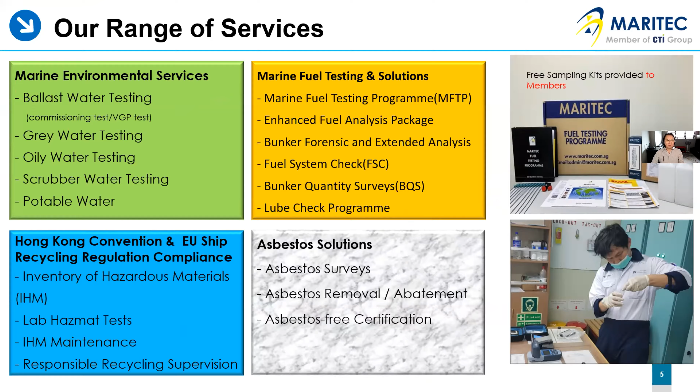Our service portfolio includes water, fuel, and hazmat testing solutions. We are one of the leading marine fuel testing labs, providing a worldwide network and support towards water testing and hazmat solutions at the moment. Where are we located? We are located in Singapore, a small island nation, and we have regional representation in Europe and Asia Pacific to service our clients.

Our fuel testing program ensures a very fast and accurate response from ISO accredited labs based both in Singapore and recently from China also.

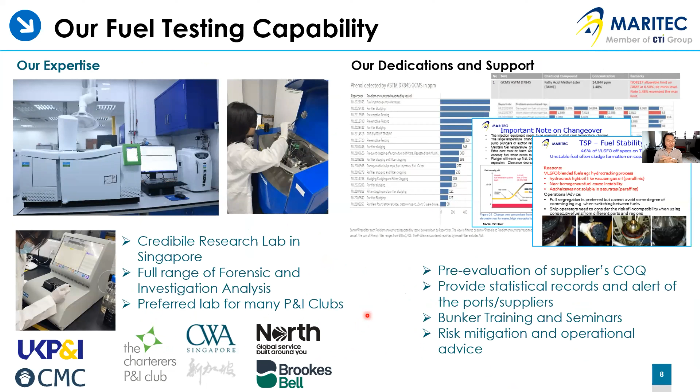Our services are not only regarding standard analysis, we also aim to provide advanced forensic analysis on fuel issues and troubleshooting, which is well recognized by many P&I clubs at the moment, as shown here. At the same time, we strive to provide well-documented statistical bunker and fuel testing records for our clients' review and records.

So with that, let's start with the main topic.

This trend observed throughout the year is quite similar to 2020, and we expect the same level of conformance to continue moving forward for VLSFO residual fuels in particular.

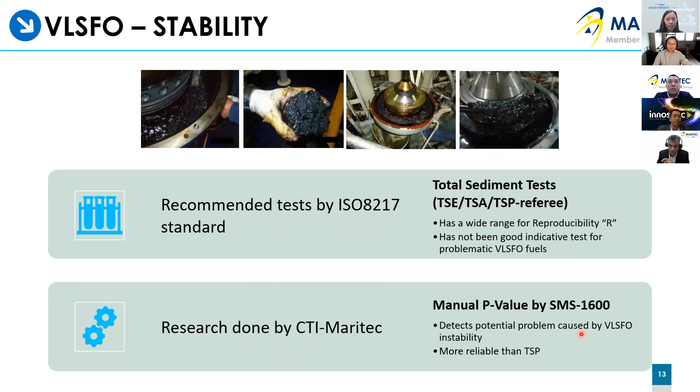What is this manual p-value that I was talking about? The p-value test was initially developed for the refinery process, and then it was later extended towards marine bunkers because it's quite a reliable test.

The value ranges from an unstable sample, which is less than 1.0, and goes all the way up to values greater than 1.5, indicating a more stable sample with more strategic long-term storage capabilities.

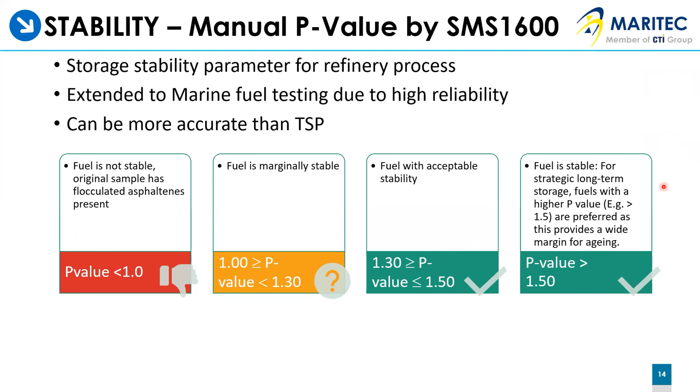This means that TSP, although a referee method indicated in ISO 8217 pertaining to the stability of the fuel, may no longer be a reliable criteria for VLSFO fuels. The p-value may be a good additional preemptive test to perform to weed out any problematic fuels, and we recommend that you do the same as a preemptive test.

Moving on, apart from stability, the cold flow properties of VLSFO, more specifically the wax formation of fuel, is starting to become a concern. So your pour point alone may not be an effective method to mitigate the risks associated with wax formation in the storage tanks or the fuel oil system.

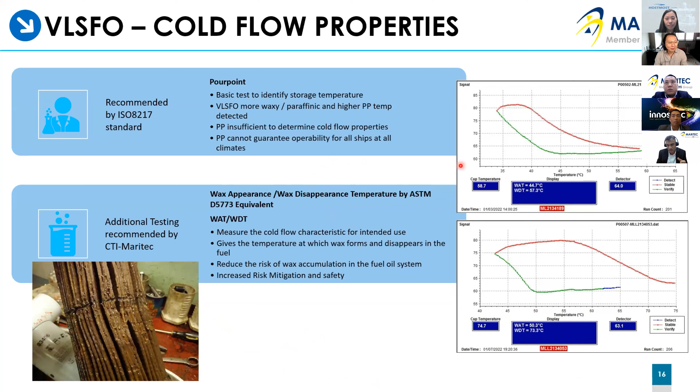Let's have a look into more data that has been obtained by the wax analysis, which has been done by WAT and WDT tests conducted by Maritec. Let's try to understand the issue a little bit better here.

When we look at the analysis data for the last one year, we can see that about 24% of the VLSFOs have pour points above 21 degrees centigrade. This we have identified as a group of fuels with a higher risk of wax formation. At this point, about 21, we recommend to conduct the wax analysis to identify the temperature at which the wax begins to form and disappear.

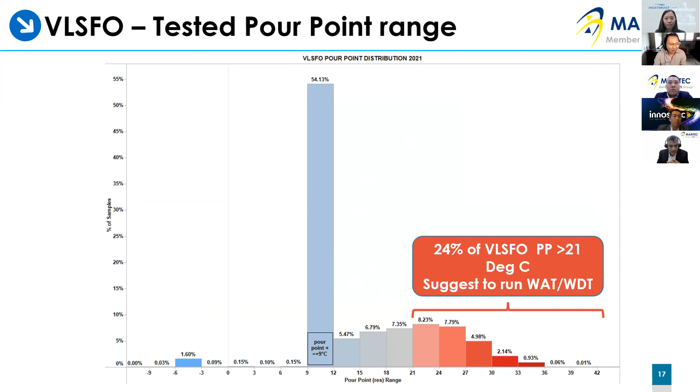If the correct WAT is not identified, the vessel operator faces the risk of solid waxes forming in the storage tank, which can later manifest as depositions and transfer issues over the course of time. So we continue to recommend, if you don't know your WAT, continue to maintain it 10 degrees above your pour point. However, in cases where the WAT is identified, this may be a much better reference value for you to store the fuel.

So this means that if solid waxes are formed due to low storage temperature, the ability to revert back to liquid fuel may prove to be very difficult.

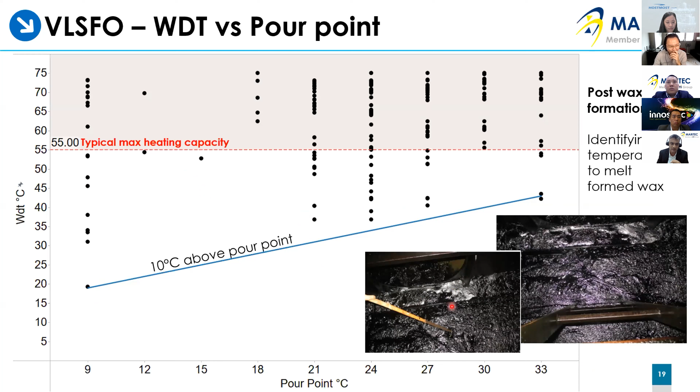Moving on, apart from wax, we're also looking at cat fines. Cat fines are still present in VLSFO fuels, even though it's low sulfur. The ISO 8217 edition caps the maximum amount of cat fines at the manifold inlet between 40 and 60 ppm, depending upon the grade in which you ordered.

At this point, we like to emphasize that proper fuel cleaning and treatment, reducing the cat fine content at the engine, is very important. This is also due to the fact that cat fines can accumulate in various parts of your fuel oil system, and only routine sampling of different points of the fuel systems can identify and preemptively prevent issues arising from cat fines in the engines.

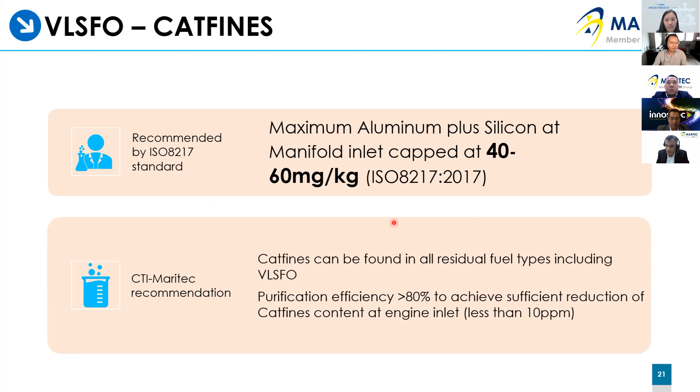And we all know that when the damage occurs, it is a very costly affair to replace a liner or pistons. But the good part is that if abrasive damage is spotted at an early stage, it can be reversed by effective treatment and reducing the cat fines content at the engine inlet.

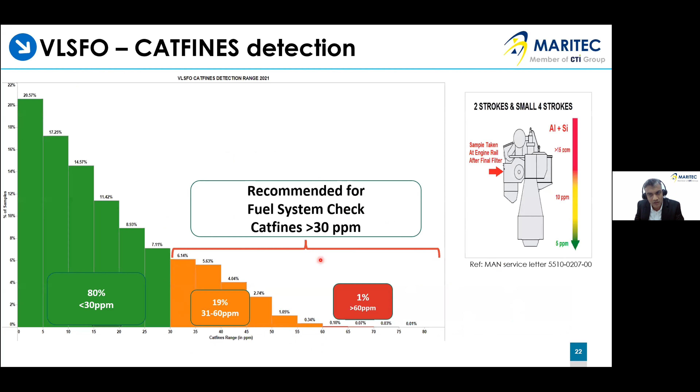So let's have a look at the cat fines detected over the last 1 year. We can see that 20% of the samples have registered above 30 ppm. At this point, when it's above 30 ppm, we recommend that further samples are drawn from the fuel treatment plant on board to ensure the cat fines of the engine inlet is as low as possible.

This will give a very good indication of the efficiency of the purification system on board, and it will ensure very good operational safety. So in conclusion, we can say that with proper care, housekeeping, good fuel management on board, it's possible to keep the risk of damage due to cat fines low. And we recommend that you send in a fuel system check sample to your lab when the manifold sample exceeds 30 ppm.

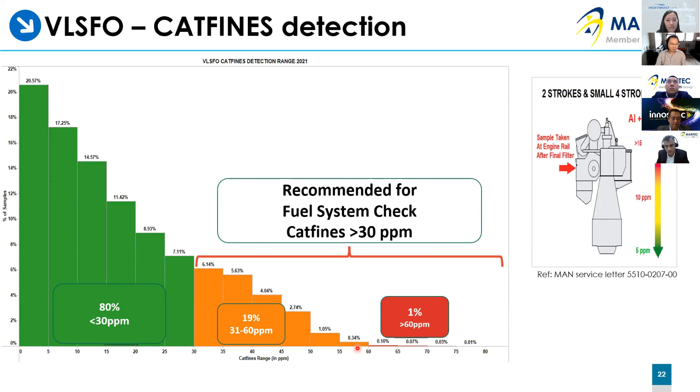Moving on, when we're looking at the combustion properties of VLSFO, normally the combustion properties of marine fuel has been determined by the calculated carbon aromaticity index, in short CCAI, which can give an indication of the ignition properties of the fuel. This is determined by calculation from the density and the viscosity of the fuel.

However, ISO has recognized the limitation of this calculation and has recommended an alternative method to check the ignition and combustion properties of the fuel. So one of the methods identified is the fuel combustion analysis, or FCA, by IP541. This identifies the estimated cetane number, which is dependent on the combustion delay which occurs on the test machine. So whatever combustion delay that occurs on the test machine is calculated to the estimated cetane number, or the ECN.

When we look at the ECN values versus the CCAI for VLSFO fuels which we have tested, we found that majority of the fuels have an acceptable ECN and CCAI values. The issue starts when the ECN falls below 20 and the CCAI is deemed to be acceptable by the calculation and the ISO standard. We can see this occurs for about 8% of the tested samples, and this fuel needs to be used with caution.

It should be noted that the fuel combustion analysis method results displayed here are done in a laboratory with control conditions, whereas the conditions and equipment used vary vastly during actual field usage of the fuel. So in the case where a fuel is suspected to have poor ignition and combustion properties, you need to take engine performance parameters, record them and correlate them back to the FCA test results with actual onboard conditions, and ensure that any manufacturer's operating limits are not exceeded. Thereby you can prove that the fuel supplied had poor ignition and combustion properties.

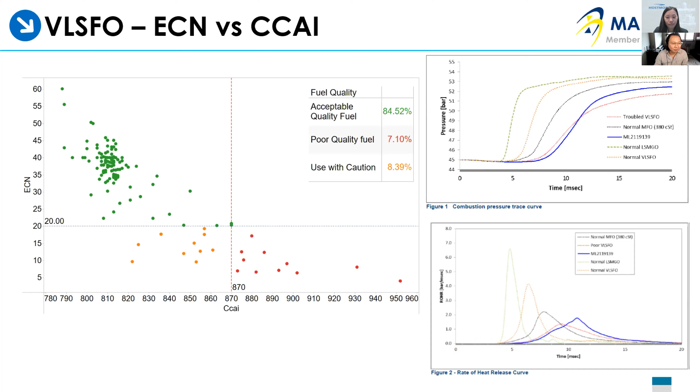Okay, we talked about some of the most commonly occurring issues. Moving on to managing fuel quality issues, specifically we're talking about clause 5 and chemical waste contamination and the effects it has got on the machinery.

So your routine test can identify compliance with ISO 8217 table 1 and 2. However, only further analysis can identify if chemical contaminants are present in this fuel. So there needs to be an understanding right now as to what constitutes a marine fuel and the acceptable sources. This can be given in detail in ISO 8217 clause 1 and clause 5.

Let's have a look at that. So what does it say? The oil needs to comprise predominantly of hydrocarbons and needs to be homogeneous. The source can be from petroleum, crude oil sands, and shale oil. It may be from synthetic or renewable sources which are chemically like petroleum fuel. It can be blended into marine residual fuel oil, but it's limited by the volume percentage specified in the standard.

However, these are the important things. It needs to be free of deleterious substances, and it should not cause any harm to personnel. It should not hinder the safe operation of the vessel or cause adverse effects to the machinery. So these deleterious substances we're looking at here can be identified by advanced detection techniques such as GCMS, which we will look into a little bit more in detail.

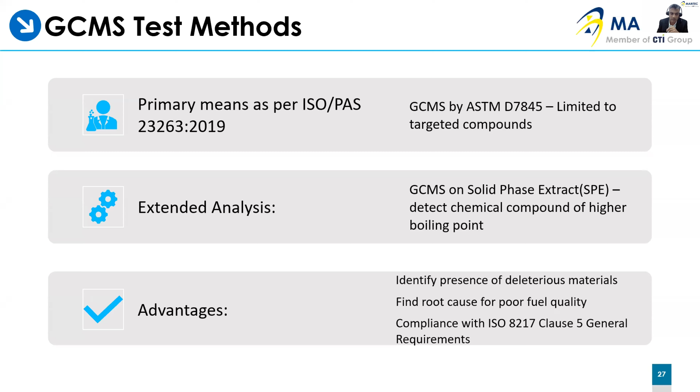Here we see the average detection by ASTM D7845 for the commonly detected compound groups for each month in the year of 2021. We are observing an increased occurrence of reactive hydrocarbon compounds and phenolic compounds, which can play a role in causing poor stability of the fuel, depending on the concentration detected. The average detectant range is around 1800 ppm for reactive hydrocarbon compounds, indicated in dark blue, including compounds like indene, styrene, and dicyclopentadiene.

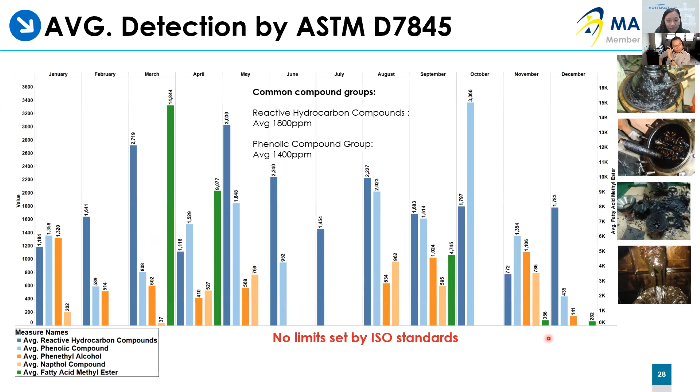And about 1400 ppm for phenolic compounds. At this point, I'd like to stress there is no maximum concentration limit in ISO standards. However, these compounds at the concentration levels detected here have gone on to cause fuel stability issues, which can cause machinery problems like excessive sludging and filter blockages, as shown.

Moving on, when we look at the concentration level of higher boiling compounds, we observe a greater level of polar non-hydrocarbon compounds, which can also lead to fuel instability. These polar non-hydrocarbon compounds can only be detected by GCMS on solid phase extract, and almost all the detections we're seeing have been accompanied by machinery issues when the fuel is put into use. It should be noted that the major compound, alkyl resorcinol, is from shale oil, which is allowed per clause 1.

More specifically, shale oil produced by the retorting process, which uses very high temperatures. When such a cutter stock is used and alkyl resorcinol is detected, it almost invariably leads to fuel instability and sludging issues on board. This is one example, where it forms a hard cake-like sludge, in contravention of clause 5, where a detected chemical species has led to a machinery issue on board, like complete damage to the purifier.

FAME and the other two compounds, fatty acids and monoglycerides, we'll discuss a bit more on the next slide.

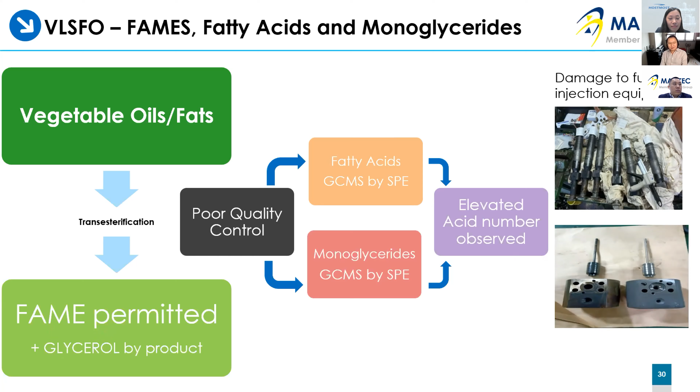So FAME, unless agreed upon by the receiver, has been limited by the ISO 8217 2017 standard to a maximum of 7% for distillate grades, that is DF grades, and a de minimis level of 0.5% volume by volume for RM residual grades. We talked a lot about the different compounds.

Now let's look at how to identify the cautionary concentration levels. I want to repeat that there are no guiding limits from ISO standards at the concentration level of each compound that can be present in the marine fuel.

So Maritec has taken the initiative to collect feedback from vessels where fuel issues have been identified, and any adverse effects to machinery have been found, which has been linked to these fuel issues. By analyzing this data, we can provide the client with empirical evidence of past cases where similar concentration profiles have gone on to cause machinery issues on board.

So this empirical evidence can support that machinery damage has occurred despite the best practices employed by the vessel operator. This analysis can also be done preemptively, so we can provide an effective warning to the vessel before fuel usage, using the same data analytics.

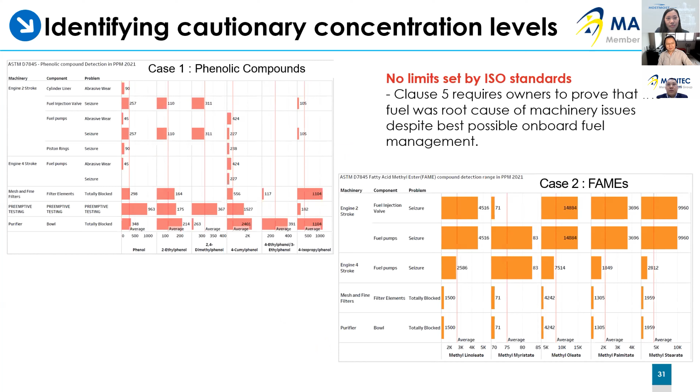In addition to the previous analysis, every time you do a GCMS analysis, we can also identify the severity of the compound concentration found, in comparison to similar profile fuels where the problem has occurred. This gives the vessel operator a good idea on the severity of the detections found in the fuel. The GCMS is a good test that can give you a very good idea, and depending on feedback from clients, we're able to advise and support them on compliance with clause 5 of ISO 8217.

Moving on, let's have a look at some of the VLSFO remedies that we like to suggest based on the detections and what we've seen in the past year.

Each of the issues highlighted has solutions either through better fuel management or additive usage. I'd like to draw your attention to the remedies and what Maritec can do proactively to manage your problem. For stability, the best practice is to avoid commingling of fuels, keep them segregated, and employ a pre-bunkering additive dosage to maintain fuel stability over time.

You can also do preemptive tests by SMS 1600 to check for possible problematic fuels, particularly when you want to store fuel for a long period of time, because your TSP, as we talked about, may not be a very good indicator anymore.

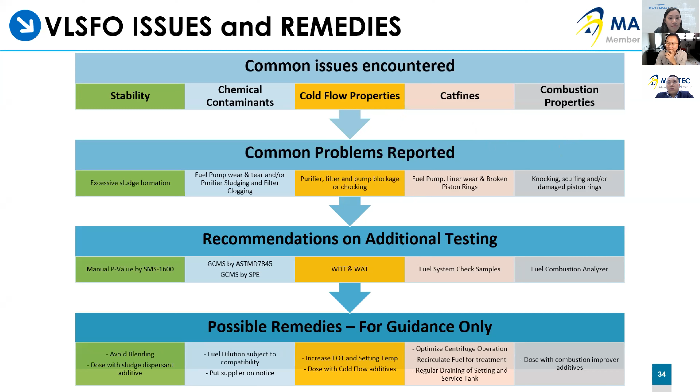At this point, I'd like to highlight the services a lab can provide. We're not limited to only providing an ISO standard report, but want to work together with you in preemptively identifying problematic fuel and helping assure operational reliability of your engines.

In cases where the fuel has gone on to cause problems on board your vessels, we are here to help identify the root cause and solve the issues. Further to that, Maritec is here to support you for any dispute that may arise on the quantity or quality of the fuel supplied.

And lastly, we are here to provide you with statistical data that helps you choose the best possible location and supplier for your bunker, while having a holistic view of your entire fleet's bunker quality performance using our in-house data analytics.

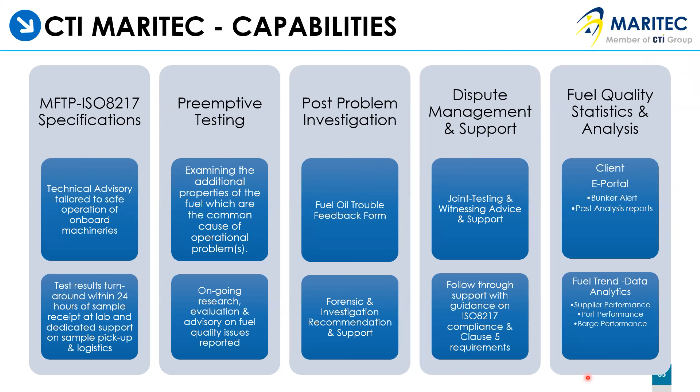So with that, let's move on a little bit towards biofuels. We can have a short brief on it, the types, and the issues that may arise on usage of biofuels. It's quite similar to VLSFOs, with a little bit extra also.

When looking at biofuels, we're looking at three main types. The first is residual biofuels with blends of FAME, commercially available as B10, B20, and more recently B30, B40, which has gone on for trial runs with certain success. The second generation is HVO, hydrotreated vegetable oils, promoted as chemically similar to petroleum fuel and considered a drop-in fuel with minimum modifications to engines. The third type is BTL, biomass to liquid, which we haven't yet commercially encountered in the labs, so we don't have much information on that.

The current ISO standards don't cater for these types of fuels, and the test methods used, with the exception of FAME content, are very similar to those of Table 2 marine residual fuels. That's what we're observing on all the certificate of quality documents we are receiving.

There are certainly advantages to switching over to biofuels, particularly the drop-in category, requiring little or no modifications to the existing setup, coupled with reduced carbon, greenhouse gas, and SOx emissions. But let's look into some of the possible problems that can exist with biofuels and the test methods that can be employed to identify and mitigate these issues.

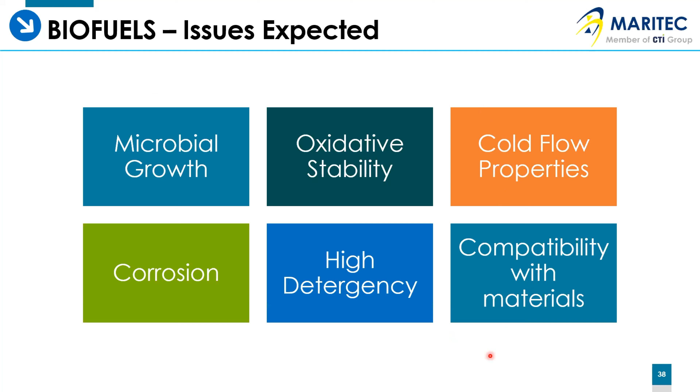So issues expected. These are some common issues, similar to VLSFO, owing to the paraffinic nature of the FAME that can be supplied. Let's discuss each aspect briefly.

We are mainly concerned with the presence of FAME in the residual fuel. Looking at microbial growth, FAME has a great affinity for water and forms a stable emulsion. This FAME and water emulsion, like fuel haziness common in distillate fuels, can generate microbial growth, which can lead to excessive sludge formation and clog your filters, affecting engine performance. The best approach is to prevent water accumulation in your fuel in the first place. You need good draining facilities and to keep the fuel at a temperature where condensation doesn't take place.

What tests can you do to identify if the fuel has this kind of problem? It's a total bacteria, yeast, and mold test, which can evaluate the potential degradation of the fuel.

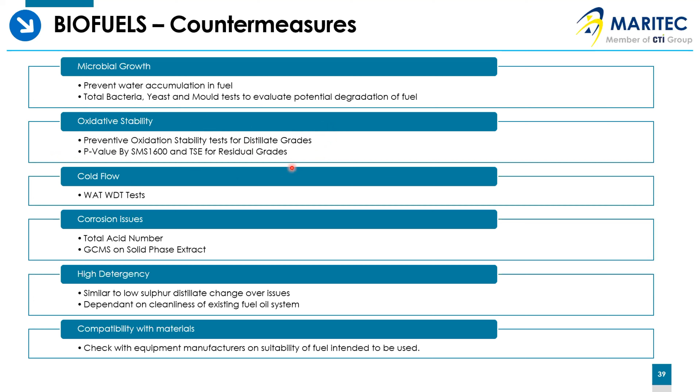Oxidative stability is already required for distillate fuels in the ISO DM grade. But FAME, when present in your fuel, can oxidize to form precipitates, which can lead to stability issues and clog your filters. It can also lead to increased acidity, and these oxidized fuel components can damage your fuel injectors. So what can we do? For DM grade, you can run the oxidation stability test, and for residual grades, we still recommend you do your p-value by SMS 1600 and also total sediment existent, to find out all the organic and inorganic sediments present without any treatment to the fuel.

Moving on, we're looking at the low temperature operation issue. FAME has a very high cloud point compared to petroleum diesel, and this can potentially cause wax formation at lower temperatures, leading to the same issues discussed before. The WAT-WDT test is reliable and can identify such issues.

Something more important is the corrosion issues. Corrosion can occur either due to FAME breaking down in the presence of water, through a hydrolytic reaction that forms free fatty acids. These species are corrosive and can attack your exposed metal surfaces. Or it can be due to microbial growth, which can produce sulfate reducing bacteria that directly attack and corrode steel tanks. This is quite common in refineries, and it can also occur onboard ships when you start using FAME induced products.

And similar to VLSFOs, as highlighted earlier, there can be a high detergency and cleaning effect. FAME in high concentrations has a solvent and scrubbing action that cleans and removes deposits from the fuel system. Depending on the cleanliness of your existing system, it may improve over time, but in the beginning you can expect a lot of filter clogging and purifiers getting sludged up.

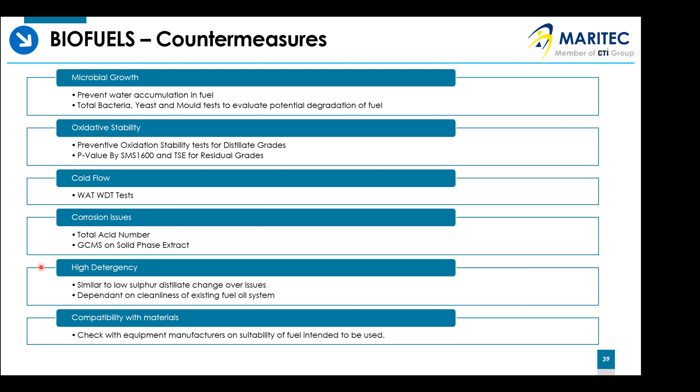Before you go for a trial or decide to implement this, you need to take careful care. You need to perform a risk assessment, and it needs to be done together with your equipment manufacturers before you proceed for a trial run.

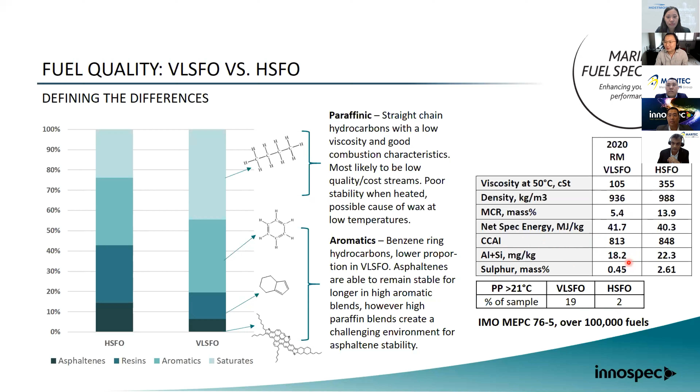Apart from that, they are actually both blended fuels. If you look at this table on the right, you can see the viscosity has gone down significantly from the time we started using VLSFO. Density has gone down. MCR has gone down, which is a good thing. Net specific energy has gone up. CCAI is something Bharath has spoken about as well - I will elaborate a little bit more when I talk about combustion. This is the only parameter to give you an indication how well the fuel can burn, is this correct? Okay, I will tell you. The good news is, of course, aluminum silicon is down, which gives the purifier less pressure to remove the cat fines. And of course, the sulfur content is as per the requirement.

Viscosity actually dictates the purification temperature today. It is very, very critical. In the past, on the ship, we always ran on 98 degrees because it was 380 CST. Today, for every batch of bunkers that you receive, people need to know that the purification temperature is different. This is sometimes given by the fuel testing company. Why is it so important to know? Because overheating is not good, underheating is also not good - you want to have optimum heating. I will elaborate a little bit further on that when I talk about waxing.

Viscosity gives you an indication if the fuel is aromatic or paraffinic, based on my last table. Why do you want to know this? The reason is because when the fuel is aromatic, they don't like fuel that is paraffinic - these two fuels can't go together. So if you're commingling, or even doing bunkering where you have a little bit unpumpable, you want to try to avoid mixing, for example, a fuel that has got 20 CST and something that has got 200 CST. This is going to give you a perfect storm, or a disaster.

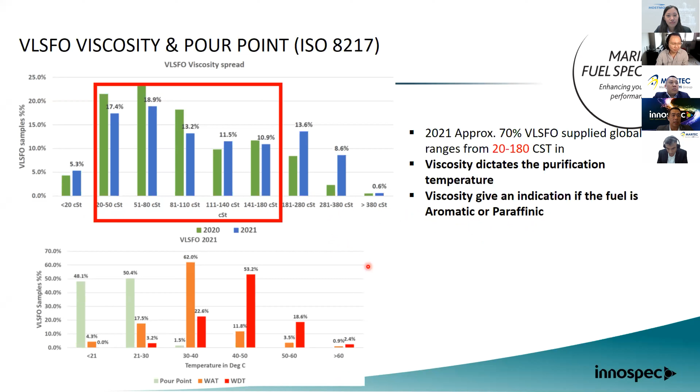The second point I want to share with you is, I think Bharath has spoken quite a lot on WAT, WDT, so I'll not elaborate on that so much. Pour point - why is pour point so important? From Innospec's experience, we have seen there's a lot of VLSFO that has got high pour point. The yellow bar and the green bar indicate the pour point. About 50% of the pour point of VLSFO is actually between 21 to 30. We say this is high and you need to pay attention because there's a very high likelihood that this fuel will also tend to have very high WAT and WDT. I will not elaborate so much on this.

Keeping storage temperature at 10 degrees above the pour point is the rule of thumb we have applied for many years, but today is questionable. Because of the blended components, this has actually driven up the WAT, WDT. So maybe you need to increase 15 to 20 degrees. But overheating is also no good, so it's actually a catch-22 situation.

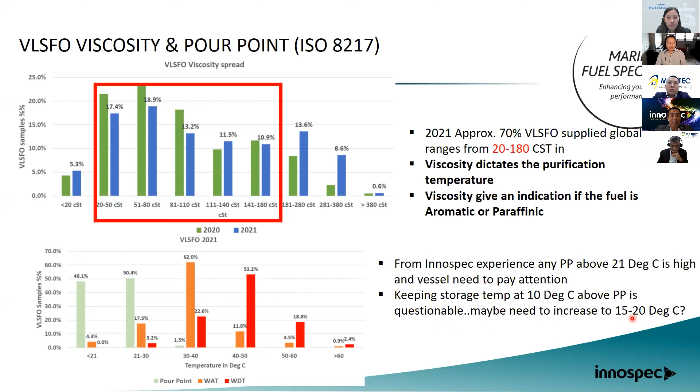We found that most of the engine damages, for example premature engine failure, piston ring breakage, liner polishing, is due to a long, prolonged burning of high density fuel. We found that actually high density fuel doesn't burn so well.

Okay, this is TSP. Like Mr. Bharath has spoken very in-depth on TSP. From our perspective, TSP, as most of you will know, is one of the parameters in 8217 to predict the stability of the fuel.

Is this accurate? So we plot a graph, we call it TSP versus issue. Don't get me wrong, whatever you see here are all 100% of the fuel that actually gave us problems during operation. This line here is the limit for your 8217 ISO TSP. Whatever you see on the right side are all fuel that are actually off-spec. These are the number of problems we saw.

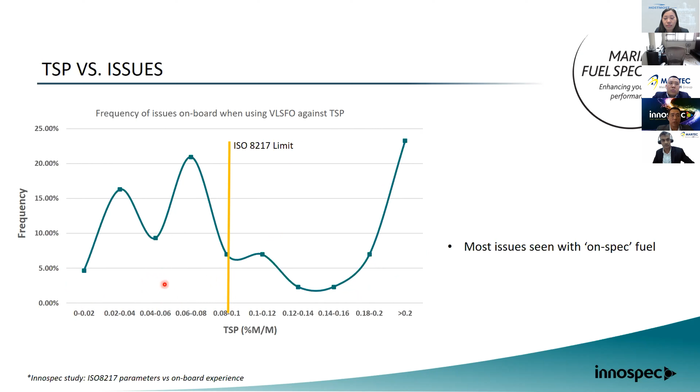You would actually expect that if TSP is accurate, then all this should not be here at all. Whatever you see on the left-hand side should not be here because these are all fuel that is perfectly on spec. However, we are seeing more problems coming from the on-spec fuel. So that gives you a question: is TSP really reliable?

When we break it down, we saw about 59% separation failure, 7% solid in tanks, blockage of filters 18%, cold flow is 2%.

You'll probably ask me why cold flow is only 2% when I earlier said there's a lot of pour point issues. My explanation is a lot of people on the ship are not able to identify it properly, so when they report cold flow, we just mark it as cold flow. Most of this portion, a lot of solid in the tanks, are actually cold flow, but people can't really make that out on the ship. About 14%, this portion here, are engine damages which we have seen.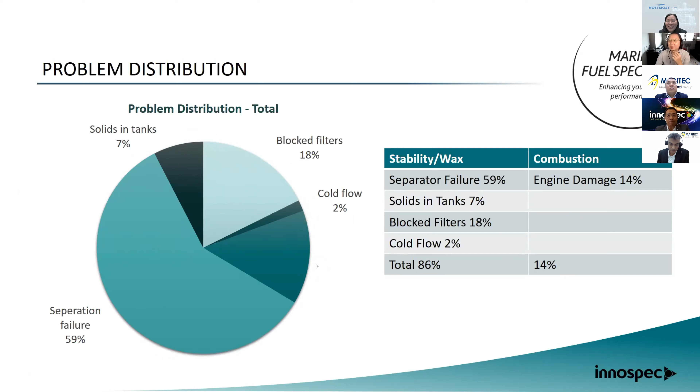Let me share with you part one of the fuel issues we have seen: stability and waxes.

Asphaltene sludge caused by fuel instability or commingling. Many of us are familiar with this because asphaltenic sludge is something we saw even in the past with heavy fuel oil. We say this issue is reversible. Before 2020, many people were cleaning the tanks, and whatever we found in the tanks before 2020 was asphaltenic sludge. So you use a good chemical, you circulate them, and you're able to reverse it. So we say this problem is manageable by fuel chemical, reversible. Okay, what is the second problem?

The second problem is actually distillate oxidation stability, or aging. Like it or not, like my age, I will not be able to reverse it. That's why we say this issue is irreversible, which means only prevention from the beginning can be done using additive as well. That is why we have a new range of additives specially to tackle this.

In the past, when we were treating heavy fuel oil, we don't talk about this. But what is the drawback? The drawback is you are not able to control the age of the fuel before it comes on your ship. Especially during the turn of 2020, we experienced that when the ship bunkered the fuel, the next moment it is gone, because this VLSFO had been sitting on the VLCC outside Singapore for months, heated and aging. So when it comes on board your ship, even if you treat it with chemical, you can't do anything.

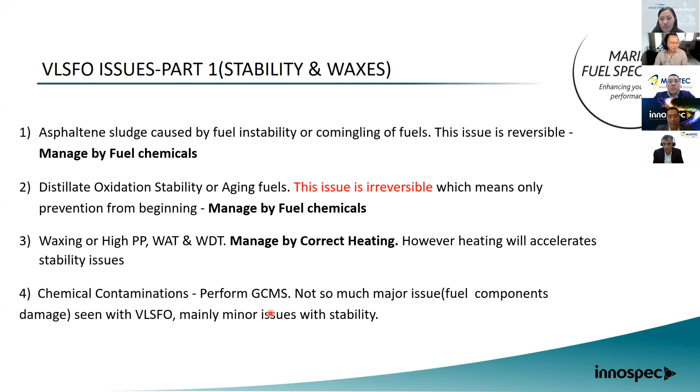These are very familiar photos. I hope you don't get them too often - I do get them almost every day. You can see here, these are all asphaltenic sludge. The nature of this sludge, you can tell, is a little bit hard. You need a tool here to actually break them up.

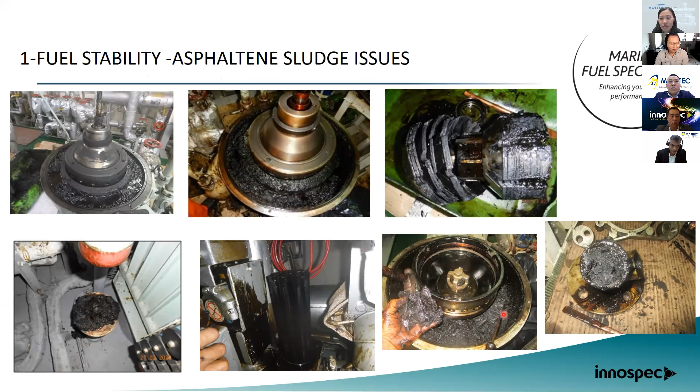The next one is oxidation stability. We've seen this after prolonged storage. That is the reason why from the beginning people say this fuel should not be stored for too long. These two photos here - this one is actually pure distillate. Why do we show you pure distillate? It's because if I put this in the VLSFO, you probably can't tell - it looks like just any other sludge. What we're trying to tell you is distillate does have sludge too. Yeah, this one is not reversible. You have to prevent it from the beginning.

This is how your MGO actually looks like when it's fresh versus when it's aged, and you need to preserve it. This one has a lot of sludge at the bottom, or we call it gums sometimes. Storage with heating - if you store it with heating, you actually accelerate this process. But there's no choice, you are heating it because you are preventing the waxes.

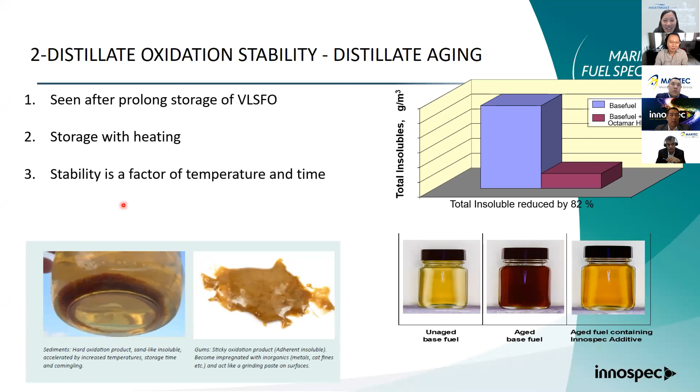Stability is a factor of time and temperature. I would like to show you a graph to relate this - it's quite interesting. The x-axis is the number of days, 0 to 240, and the y-axis is the reserve stability number. It is another way to predict stability of the fuel. We are very familiar with this. Of course there are many methods available - you have RSN, you have p-value, you have p-ratio.

From our perspective, this is quite a reliable test compared to TSP, much more reliable. What we're trying to say here is this is line 5, indicating that the fuel is stable. Whatever is below that line, the fuel is stable.

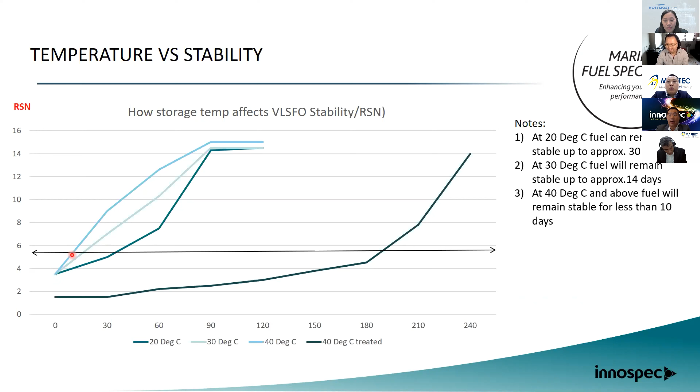Of course, for the purpose of the test, we took a fuel that is stable. What we did was simulate different temperatures. At 20 degrees, indicated by this green line, the fuel will take approximately 30 days before it turns unstable. Now I'll increase the temperature to 30 degrees, this middle line - the fuel is actually stable for only 14 days before it becomes unstable. Then at 40 degrees, the very common temperature we maintain in the bunker tanks, it only lasts for less than 10 days before it becomes unstable.

So what we did, of course, was try it with our product, and we saw significant improvement - this particular fuel was able to stay stable at 40 degrees for up to 180 days. There's a disclaimer here: this is to show you that all the fuels have got the same pattern of behavior. I'm not saying all of them will have the absolute numbers - some fuel, even with or without treatment, might be just around this range.

Some fuel that is not treated might be stable for longer, some is even shorter, but the pattern is very similar. I hope that is clear enough.

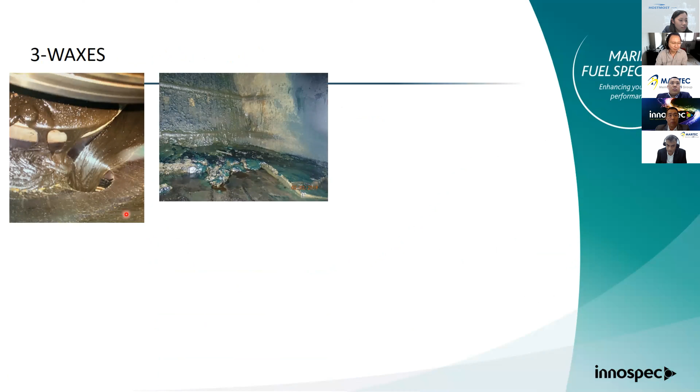Okay, waxes, very interesting. I think most of us that have seen fuel on the ship might be able to tell that this is waxes because it looks a bit like grease. What about this? And what about this? You can't tell. Even with so much experience looking at the black stuff, we can't tell. So what you can do is probably only analyze it in the lab.

These examples, I would say, are a combination. So what you're trying to do on board the ship is more like trial and error. But it's important to know what the causes are.

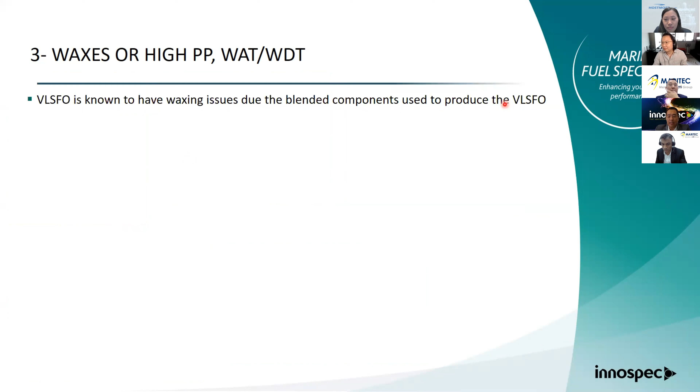VLSFO is known to have waxing issues due to blended components used to produce VLSFO, like I've said earlier. This can be seen with high pour point. Many VLSFO today, 50% of them have got a pour point above 21. This is a good point to note.

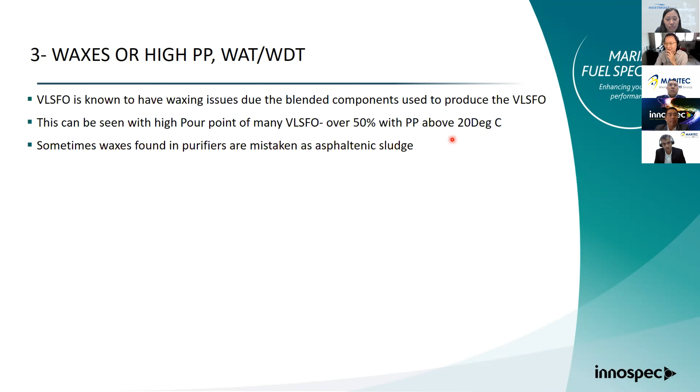Sometimes waxes found in purifiers are mistaken for asphaltenic sludge, which is very common. We see this, especially how waxes might form in purifiers. We are seeing it happen very frequently, especially on low viscosity fuel.

Why? Okay, this is the table. I believe many of you are familiar with it. Like I said, viscosity dictates the purification temperature. Today, if you do a test with Maritec or whoever it is, what they'll tell you is if you have fuel at this viscosity, this is your corresponding purification temperature.

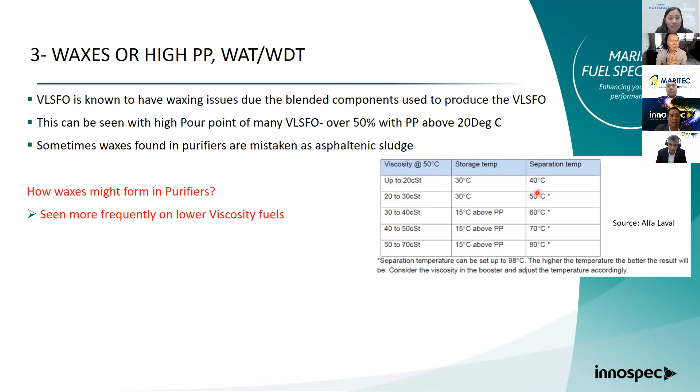What happens here? Like what Bharath said, at any point during storage, if your temperature has gone down below the WAT, what you need to do is heat the fuel up above the WDT to dissolve the wax.

Let me give you one example. If you have a fuel which is 22 CST, but the pour point is probably 25 -- it's quite common -- my WAT could probably be, by rule of thumb, supposed to heat it 10 degrees above, so that's 25 plus 10 is 35. But my WAT, if I don't know, might actually be 40. And my WDT could be 52. If you look at this, when you're purifying at 50, it is actually not sufficient. So that is why we said sometimes what you see in the purifier is actually not sludge, but wax.

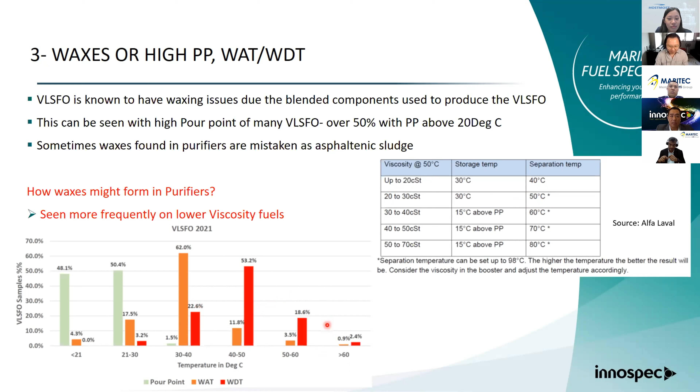I'll share with you one case scenario. This ship -- I've taken out the name, of course, and the company. Sorry for that, but I don't think you know this ship anyway.

Viscosity 33, pour point 15, sediment 0.02 -- perfectly fine. No indication at all to say that this fuel is bad. Laboratory said maintain temperature 25, which is 10 degrees above, perfectly fine. Recommended purification temperature 60, according to that table.

So what happened? This ship was actually using our additive HF10 plus from the beginning. So we said, yeah, we are quite confident that at least issue number one is 90% eliminated. Issue number two, 50% -- we suspect this could possibly be wax.

So we told the chief engineer on the ship, why don't you start increasing the temperature in steps of 5 degrees? So the chief engineer increased it, and this is what he came back with: the purifier now observed minimal sludge generation as we started to adjust the temperature setting of the purifier inlet to 75, in steps of 5 -- 65, 70, 75 -- and then observe.

What we told them is if you go above 20 degrees from what is recommended in the table, and the problem is not going away, then you should reduce it back -- then the problem is not wax, the problem is something else. So in this case, we told them they should stop at 80, but at 75 they saw that the thing was actually gone. So this is a very good example of a try and error kind of method.

If you use a chemical, you are able to eliminate it. If you don't use a chemical at all, you can't tell -- it could be sludge, it could be wax, so you need to do that as well.

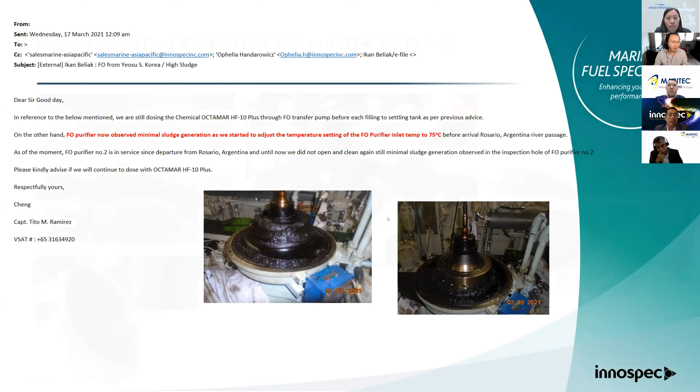Okay, so what is this? This is more interesting -- we call it insufficient heating during winter months. We saw this in the tank, we saw this in the purifier outlet, we took this in the workshop. At a temperature of maybe about 38, 40 degrees, the fuel is frozen. You heat it up to 90 degrees, the fuel starts to flow. Why?

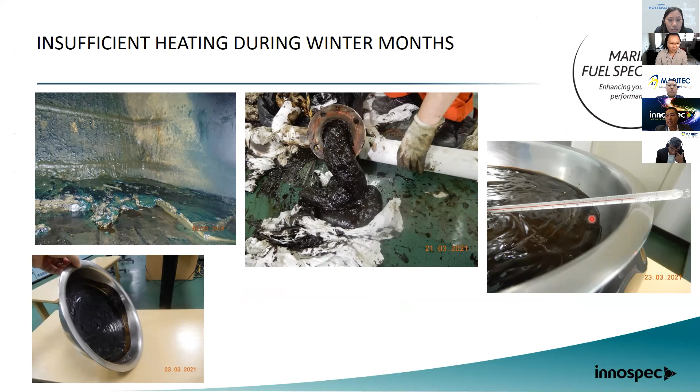What is the solution? You need a longer heating time and temperature, and maybe even circulate within this tank. A very good comparison will be like if you're drinking a chocolate drink.

What happened in the before photo was this ship was taking suction before this tank was homogeneous. It's like when you're drinking a chocolate drink - if the chocolate is sitting at the bottom and you start taking from the top, which is the lighter components, what will you find at the bottom? Chocolate, heavy chocolate - same thing. So in this fuel, you really need to make sure that it's homogeneous, heated correctly.

Maybe a longer heating time means, I would say 20 degrees above the pour point, maybe 7 days, because we also noticed that a lot of chief engineers only heat for 2-3 days and then start consuming. It's a big problem, especially high pour point with long storage.

This will lead me to my last slide on summary. From our experience, about 50% of the fuel-related issues can be avoided if managed correctly. These are operational issues.

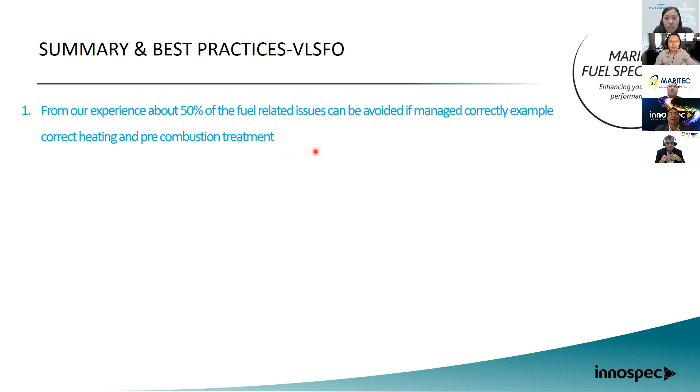For example, correct heating and pre-combustion treatment, meaning whatever you're doing with your purifiers. We have seen many cases of people not knowing the good viscosity, the viscosity pour point. They are not heating at the right temperature - overheating, underheating, and doing all sorts of things. I would say 50% can actually be eliminated.

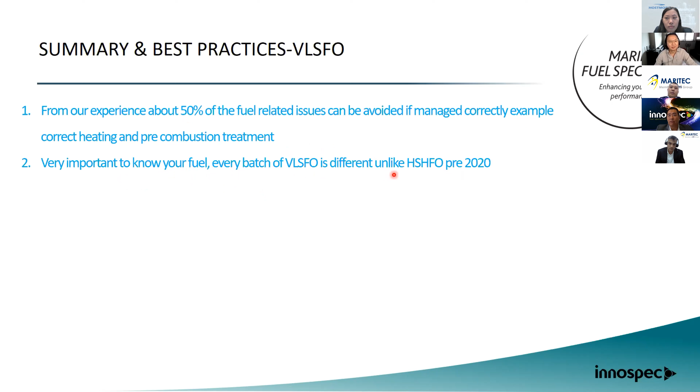Very important to know your fuel. That's why I said testing is something that you need. You need to know the fuel - it's unlike every batch of VLSFO, it is different from high sulfur heavy fuel oil, post 2020 versus pre 2020. Although ISO 8217 specification is questionable, some of the parameters are still very important in determining the characteristic of the fuel, for example viscosity and pour point.

Our advice is when a vessel is experiencing sludge from filter clogging or separator failure, we need to determine if the sludge is due to stability or due to wax. So if it's wax, we call it wax, and we don't call it sludge actually.

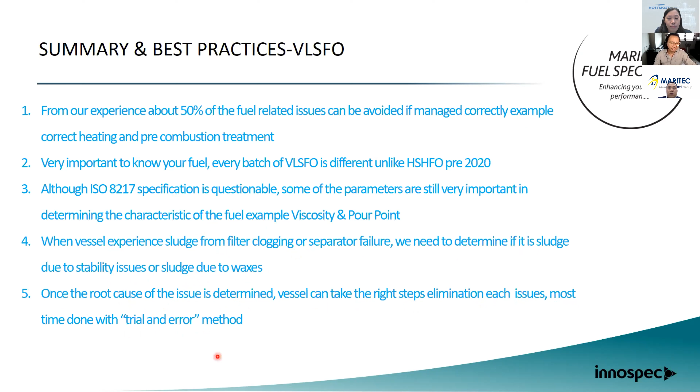Once the root cause of the issue is determined, the vessel can then take the right steps to eliminate it. Most of the time it is done by trial and error method. If you do not know the root cause, then you're probably applying the wrong steps. We have come across people using our additives and then saying our additives actually don't work, but with our help, they actually managed to solve the problem.

So what are the best practices? First in, first out - avoid prolonged storage. This is very important. I would agree that many technical people said this is beyond our control - no choice. But if you can, try to do this, especially when the pour point is high. You don't want to heat it for too long. If the storage is over 30 days, then you need to treat it with chemical to prevent aging and oxidation from the beginning to maintain stability.

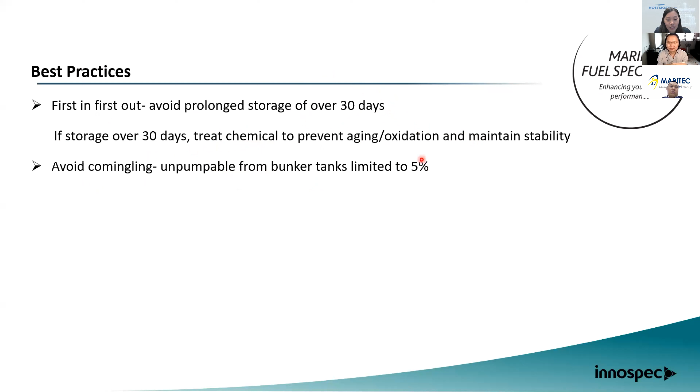You don't want something with this 20 CST with 200 CST. They don't like each other. So this is one of the very good steps that you can follow.

Ensure that the fuel is heated during storage, especially in cold weather conditions. However, when you heat it, you need to consume it as soon as possible. If not, ensure sufficient heating is applied for approximately 7 days continuously to 20 degrees above the pour point. That scenario I showed you, we told them this because 2-3 days and 10 degrees above the pour point is not enough to bring that fuel back to a homogeneous level.

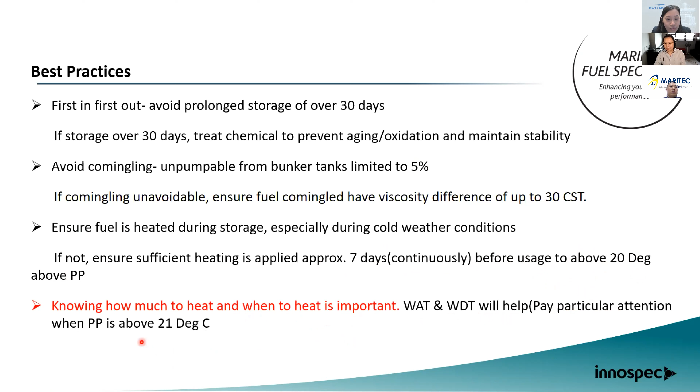Knowing how much to heat and when to heat is important. WAT and WDT sometimes come in handy. So pay particular attention when the fuel is above 21 degrees. That is when you need to act.

That's the first part. The second part I'm going to cover is actually talking about engine combustion. If you have any questions, please post them there. We'll try to answer, we have sufficient time, I hope, later on.

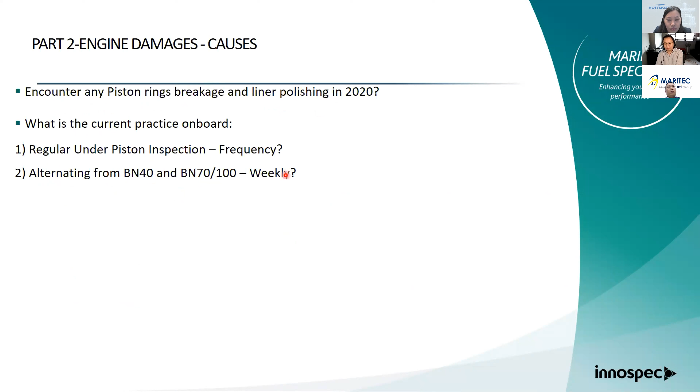We've encountered piston ring damage and liner polishing after 2020, quite a lot. What is the current practice on board? Whenever people experience this, what they'll do is increase the frequency of under-piston inspection, just because they want to check the condition of the piston ring pack. Many of them are also alternating BN40 to BN100 weekly, can be 2 days, 3 days, depending on what the condition is after the inspection.

This is recommended, and of course the OEM recommends cermet coated rings. A lot of people are also using drain oil analysis. They want to see what the residual BN is and also if there's any metal carried over. And of course, maybe CLO, we're also talking about category 2 CLO.

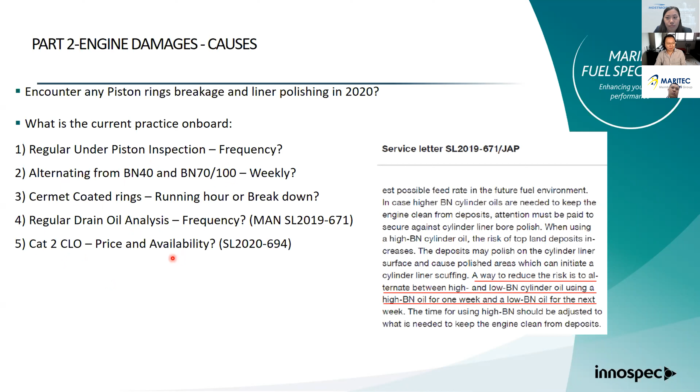What is this category 2 CLO? Category 2 CLO is basically a BN40 CLO with 100 BN detergency. We are talking about detergency here because we need the detergency to clean the engine.

What are the earlier findings in the industry? What does the industry suspect? Poor detergency of BN40 causing excessive carbon buildup in the ring packs. So what they do is alternate CLO to gain better detergency from the higher BN CLO.

So when you see this condition in your engine, what you will want to do is either increase my feed rate or better increase my detergency, so I change to 100 BN. However, excessive BN—because you don't need so much BN since your sulfur is low today. Base number is to neutralize the acid produced by the combustion.

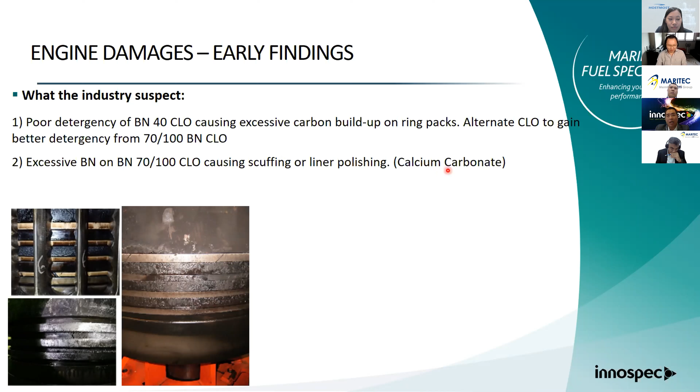When you go on high BN, what is the problem? You have a lot of excessive calcium carbonate, which looks something like this or something like this. This is going to give your liner scuffing. So what you need to do is find a balance. You need a balance.

Let me just ask you one question. How many of us have seen this condition when we were running on MGO? MGO with 40 BN, we don't see this. But we never talk about detergency when we run on MGO because the combustion is good. We don't need cleaning, there's nothing to clean. So what we are trying to say here, why does nobody want to talk about combustion?

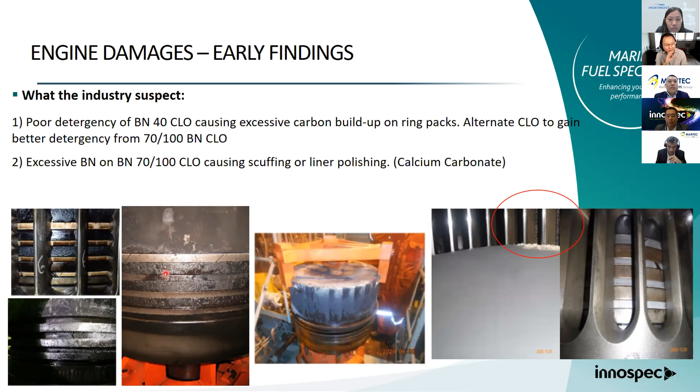I will share with you what the OEM has said. In the beginning, CLO grades—everybody is pointing towards the direction of CLO. OEMs, I hope none of them are here, but I don't think many of you will disagree, are happily selling rings and liners. So they said cermet coated rings. Existing condition of the liner might be a problem—if your liner doesn't have the capability to hold the CLO, yes, that is something you need to look at. That's a very common misconception in the industry.

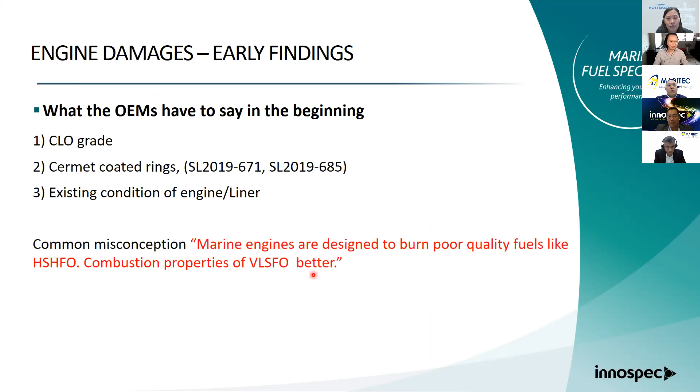What they say is marine engines are designed to burn poor quality fuels like high sulfur heavy fuel, right, and combustion properties of VLSFO are better. This is a wrong misconception. I will tell you why, from our findings and many people from the industry as well.

This is very interesting. I don't have time to go through the full article, but this guy was actually from ExxonMobil. What he said: CCAI is an index developed in the 80s to tell you the combustion property of the fuel. As such, CCAI is 40 years old. It's a test result essentially calculated based on density and viscosity levels. It may show that the fuel is good, but when it arrives on board, it may not burn well. In the worst case scenario, the engine can become seriously overloaded and rings will break.

Not firing correctly, rings will break. So what we know is CCAI is actually derived from your density and viscosity. There's no way we have seen VLSFO that actually have a bad CCAI, but that doesn't mean the combustion is good. The number going down indicates it is good, but we agree fully with what he's saying because we have seen many cases like this. CCAI going down doesn't mean the combustion is good for VLSFO.

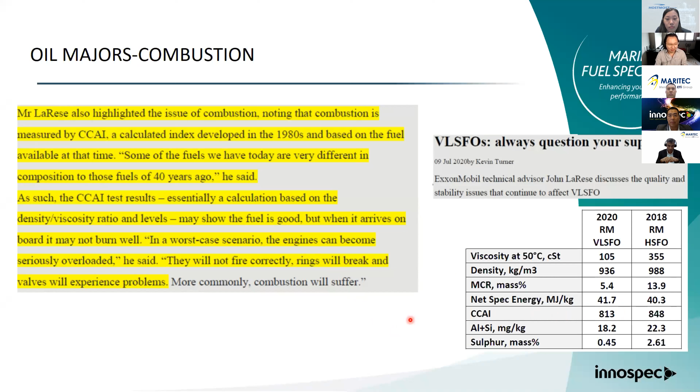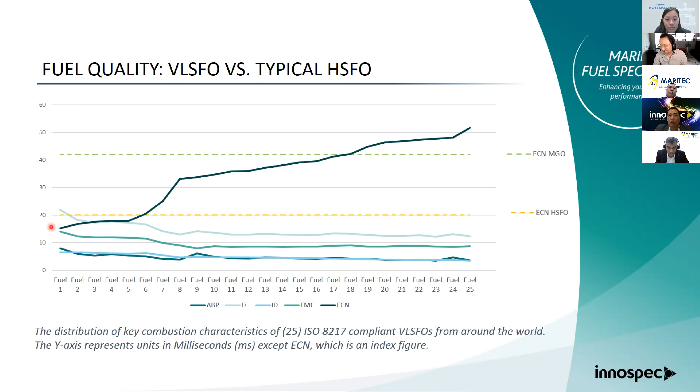In the case where you have engine damage, it's like if you're running prolonged with this kind of fuel. Okay, what have we done?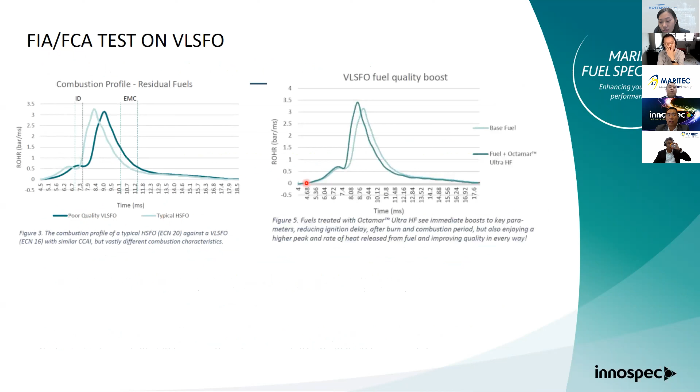We have done a lot. This is a FIA FCA test comparing poor quality VLSFO and typical HSFO. We saw the difference, ignition delay, end of main combustion. What we're trying to do is use combustion catalyst to improve the curve. This is what we see: estimated cetane number improvement 7%, end of main combustion improvement 5%. We have actually also tested it on many types of fuel as well.

This is one case scenario I want to share with you. This case is one of the customers that was running this new liner, new piston ring, after only 80 hours they saw a huge deposit of calcium carbonate and a lot of this. This is actually a result of the burning CLO.

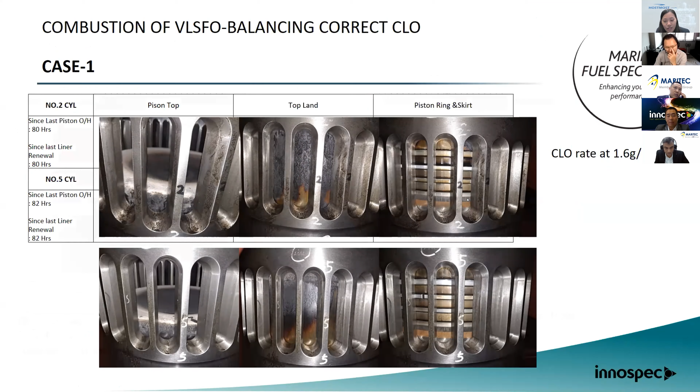So what happened? They were feeding it. Many times, a lot of people, when they see all this problem, they keep feeding CLO, which is going to be catastrophic. So what happened to the liner, which was new after 80 hours? Both of them look the same, but number 2 became like this. This is scuffing. It should look like this. So what we're trying to say is we have seen a lot of cases, people coming to us like this, but combustion doesn't ring a bell to them, which surprises me.

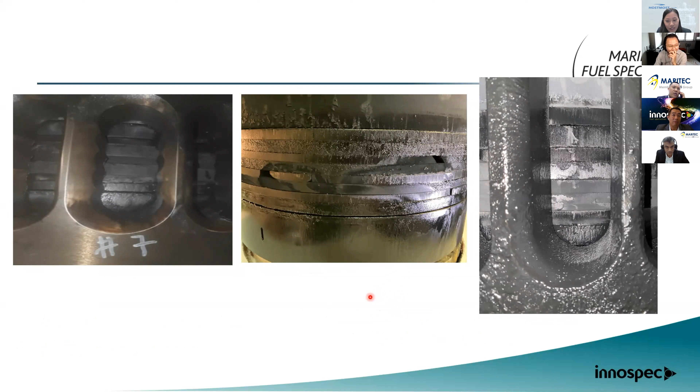People talk about CLO. Yes, we are not saying CLO is not the problem. You need to have a good balance, but at the same time, if you have done the balancing and you think the fuel is not burning well, then you should give the fuel some assistance.

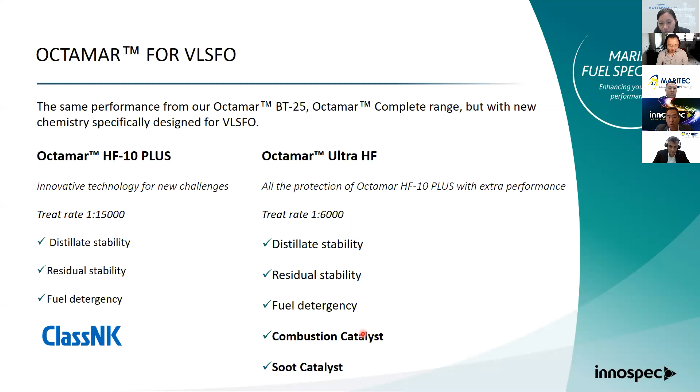So we have 2 products that we came out with after 2020 for VLSFO. HF10 Plus, this is a basic dispersion stabilizer just to take care of the 3 problems of stability of this fuel, which is verified by NK. The other product, which is a more premium product, also takes care of the 3 problems and the combustion problem. We have a combustion catalyst, and what we do is improve the combustion property.

I think I'm running out of time. I'll try to speed up.

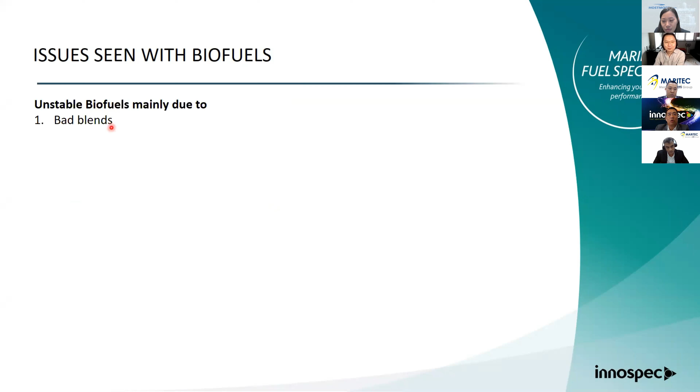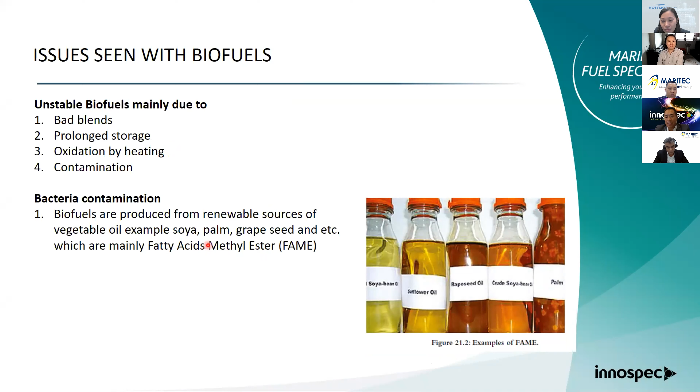Do we have a lot of experience with this? Yeah, like what Bharath said, water is required for microbial growth - it will not grow without water. Microbial in general lives at the water-fuel interface. Water at the bottom, and you have biomass, and then diesel on top. So what you can do is, of course, remove the water.

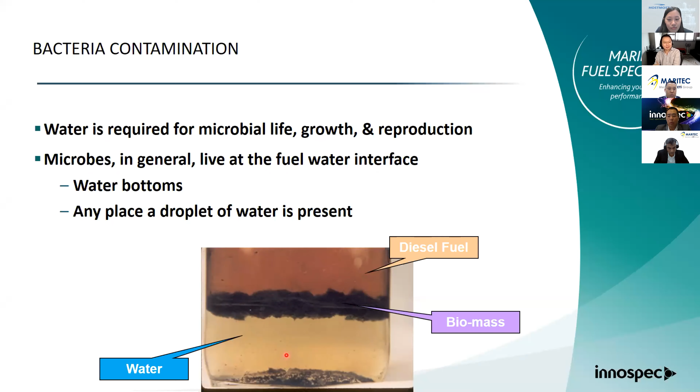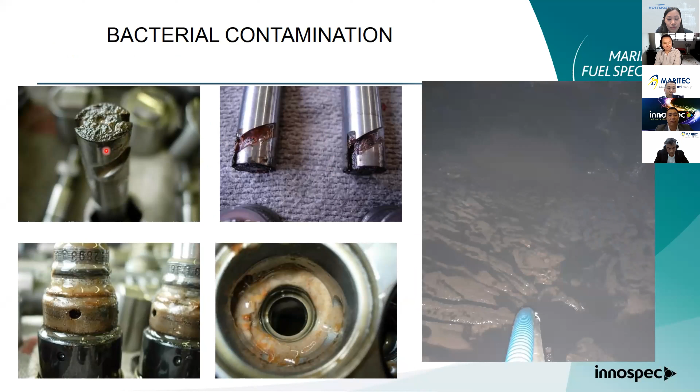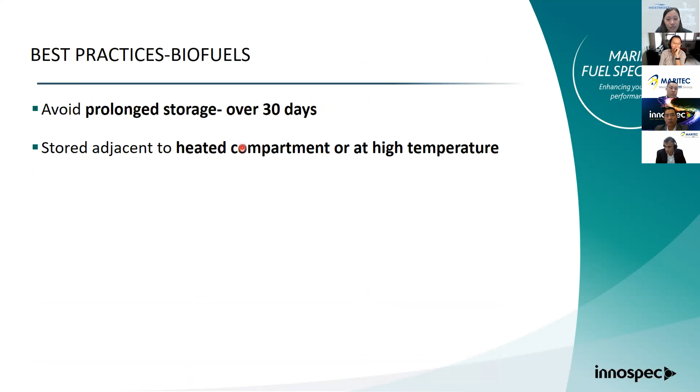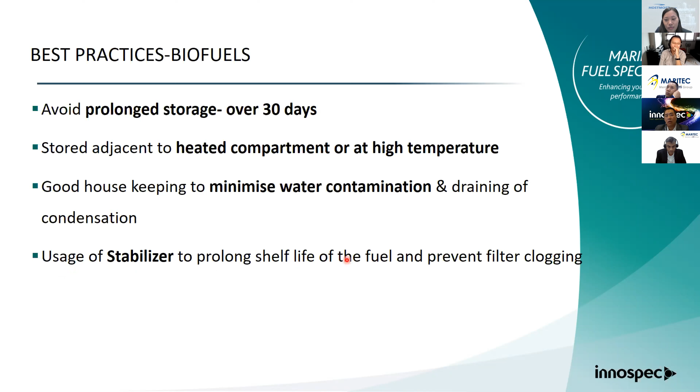What are the best practices? Avoid prolonged storage. I don't see this problem with trials because many people don't keep them too long. Even with storage, you need to decide where to store them - it should not be beside a compartment that is heated. Good housekeeping, minimize water contamination. Draining - nobody actually drains the diesel oil tank, but it's very important for biofuel. Use a stabilizer to prolong the shelf life of the fuel and prevent filter clogging. If you suspect bacteria, you might want to use biocides to prevent bacterial growth, mainly from FAME.

That will bring me to my last slide. I hope I'm not going too fast - I only have one slide.

I believe all of you know EEXI and CII, the Carbon Intensity Indicator. We have already worked with Lloyd's and many other classification societies with a protocol whereby we want to test on board your ship, or any ship, to verify the SFOC consumption. I believe many of you are going back to check your ratings for CII - A, B, C, D, E. What we can do is, of course, reduce 2 to 3% of your SFOC.

This is one of the papers we published with CIMAC talking about engine cleanliness and long-term usage. At the end of this paper there's a summary of the fuel economy reported using Octamar products. We know in this requirement your target every year is 2% - from 2023 onwards you need 2% saving. So it's not really significant what we can give, but I think today everybody is trying to look for something that can help even with 2 or 1%.

If you have any questions on this, we have a long presentation. Please contact us or we'll contact you. That's all - handing over back to Gabian. I hope I'm not running too late.

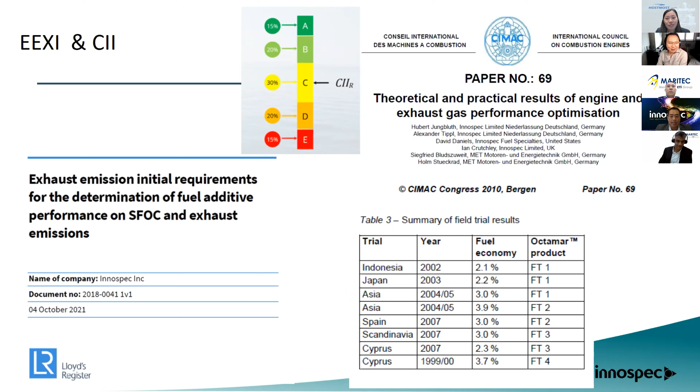It seems that two years on from IMO 2020, people are still having issues with VLSFOs. And I think it's quite amazing what additives can do to help improve the quality and parameters.